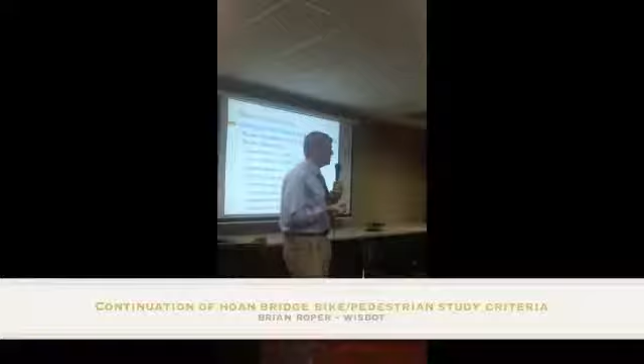Some of the study considerations: the primary charge was reviewing the engineering feasibility of bicycle and pedestrian facility alternatives, approximately 2.5 miles between Veterans Park and Cupertino Park. There are some things that, in the interest of time and money, we didn't address. We had a very accelerated time frame, and we felt it was important to get to this point to be able to move forward with making a decision.

The considerations you see are the same ones we had when we were out in Bayview in August at the town hall meeting. Same considerations that we presented we would look at are indeed addressed in varying detail within the study.

Traffic operations and safety for all, meaning vehicular traffic as well as bicycles and pedestrians. Americans with Disabilities Act compliance, thinking primarily of pedestrians. Need and probable use, availability of alternatives, and the estimated additional or incremental costs, which is part of the Complete Streets requirement.

So now you have a sense of why we're here and what we're looking at. Let's get a sense of what we have out there today with existing conditions.

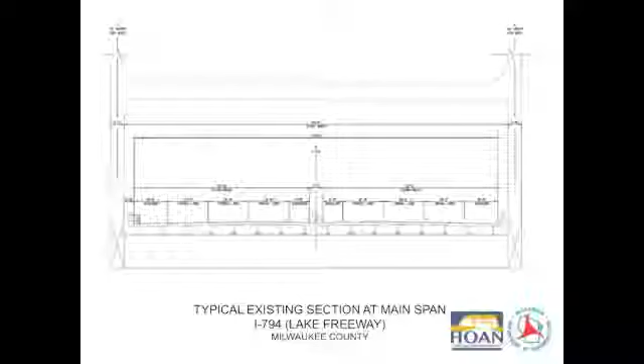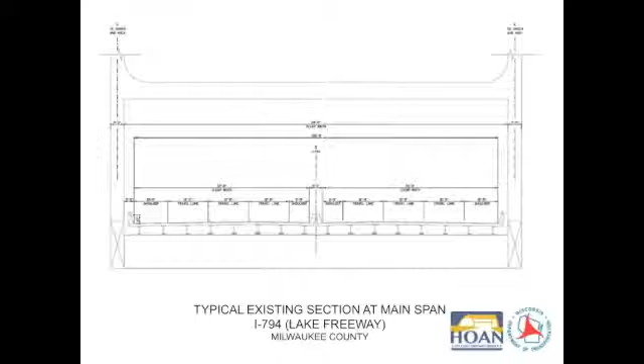This is a typical cross-section, like if you took the existing Hoan Bridge and cut a slice through it. A couple things to point out: the Hoan Bridge itself is actually two parallel structures. At the tied arch span, it's basically one structure combined together, but for most of its length it's two separate structures next to each other, going down to the ground on two separate piers, with about a 4-foot difference in the middle.

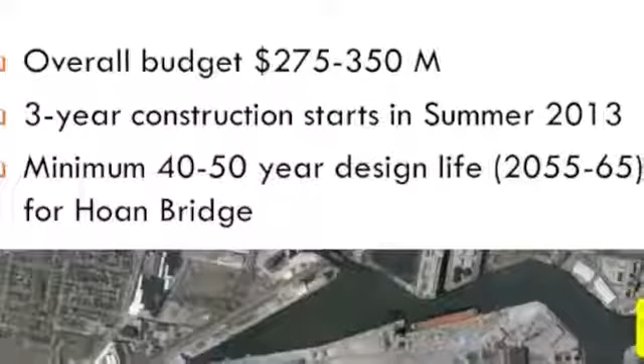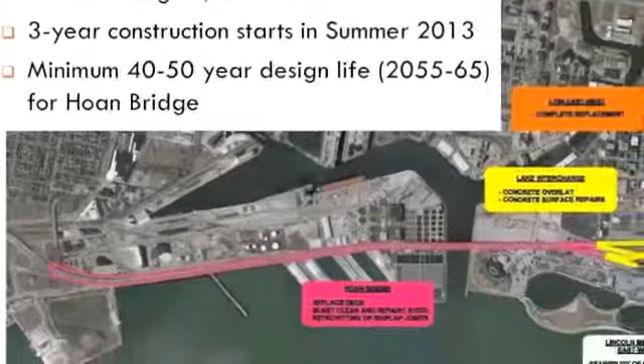Speaking of the Hoan Bridge, just a brief summary of why we're here. Big picture, we have a very large project coming, and it's going to be extremely challenging when under construction. There are actually 3 components to the I-794 Lake Freeway Hoan Bridge rehab. In the upper right, the orange block, is the I-794 east-west.

As part of the Marquette Interchange project, I-794 along the south side of downtown was rebuilt up to the Milwaukee River. Those remaining structures from the Milwaukee River down towards the lake will be completely torn down and reconstructed. The second phase, in yellow, is the lake interchange, where we're presently planning concrete overlays. Finally, the Hoan Bridge itself, the 2.5 miles, will be doing quite a bit.

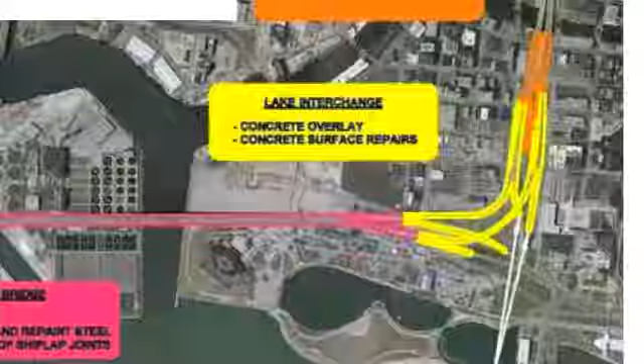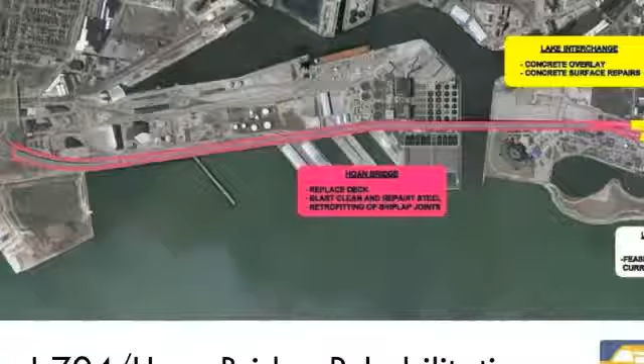This is the midpoint of the bridge's life. Major maintenance is required, including replacing the concrete deck driving surface, cleaning all the steel underneath, and making structural improvements necessary to extend the design life a minimum of 40 to 50 years into the middle of this century. This 3-year construction period will begin in 2013, with an overall budget of $275 to $350 million.

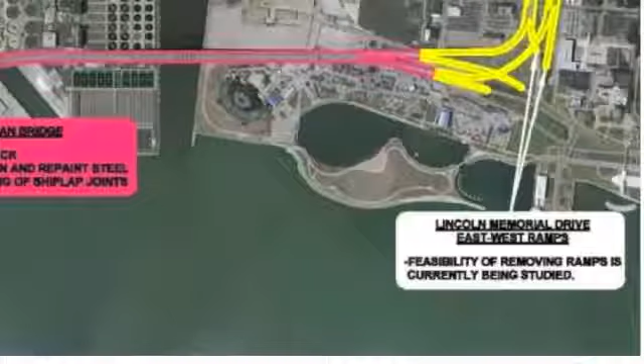Since our last meeting in August at Bay View, the department, in partnership with the City of Milwaukee and Milwaukee County, is also looking at a couple of the ramps, specifically those east-west ramps leading from I-794 to Lincoln Memorial Drive, determining if there are reconfiguration or removal options. It's a separate track that does not impact the traffic analysis, because we looked at big-picture traffic demands across the Hoan Bridge, which would not be affected by those ramps.

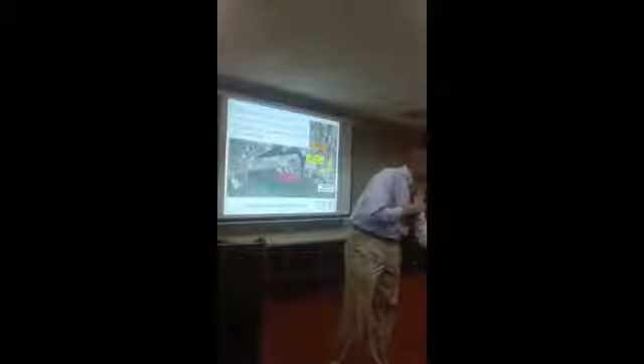It's also nice to point out the department has had a pretty long and positive partnership working with the City of Milwaukee and Milwaukee County on transportation planning efforts, including the Lakefront Planning Committee that just met. So the department is in tune, flexible, and adjustable when it comes to meeting with our local partners and working on common solutions.

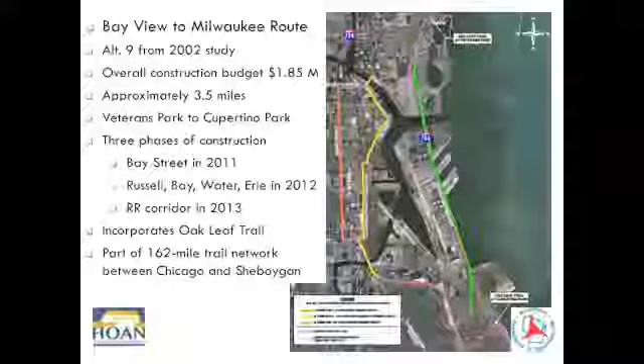The other existing condition is the Bay View to Milwaukee route, which was Alternative 9 from the 2002 study and has since been somewhat modified. The overall construction budget for this improvement is about $1.85 million. It's actually the first phase; the raised bike lane as well as the bike striping along Bay Street were completed this year.

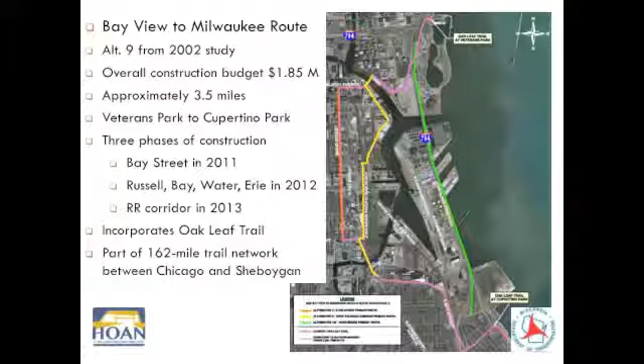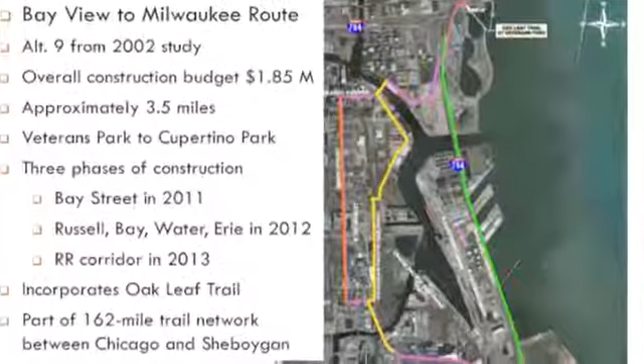There's still a couple phases left next year along several streets south of Bay Street, on Russell and Bay itself, as well as on the north end with Water and Erie. You can see them there, near the top. And then that middle part, the Canadian Pacific Railroad corridor, will be constructed in 2013, connecting Veterans Park to Cupertino Park and also incorporating part of the Oak Leaf Trail.

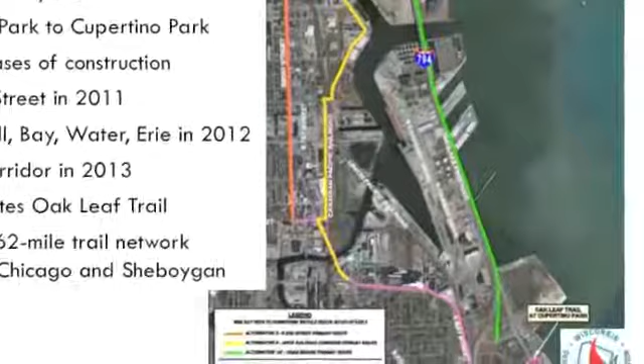One nice thing is this is also part of that 162-mile network that runs from Chicago to Sheboygan. Having that connection in place will make it so that bikes can already enjoy that kind of scenic bike ride.